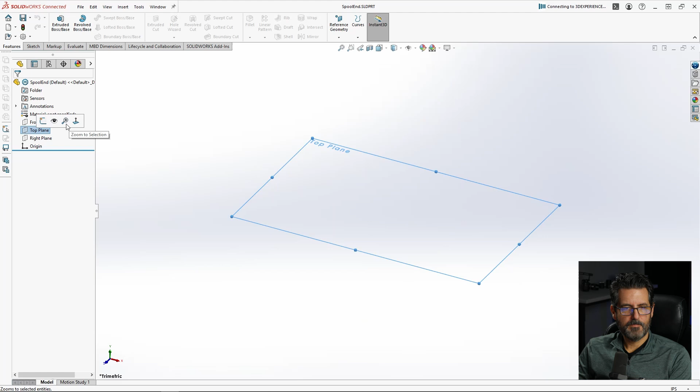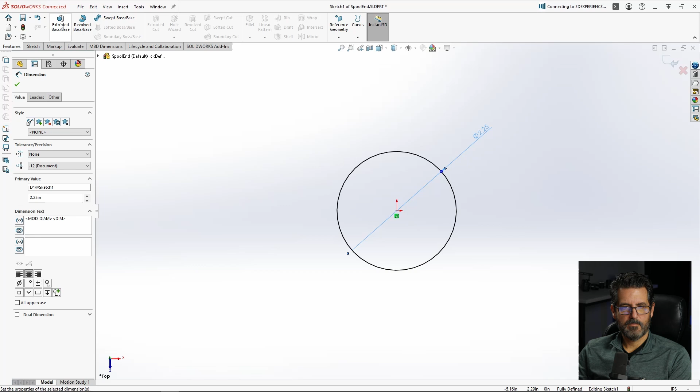Start on the top plane. Do a circle, so right click and drag to the right. Right click, drag upwards. And now we're going to make this 2.25. Going to extrude it. We're going to make this a 1/16 of an inch. And hit OK. Alright.

Let's make our little protrusion here. The inner diameter of the spool is 1 inch, so we're going to make this 0.96, give it a little bit of clearance. That way it'll slide in nicely. And then we'll put some fingers on it to hold tension. So let's go ahead and do that.

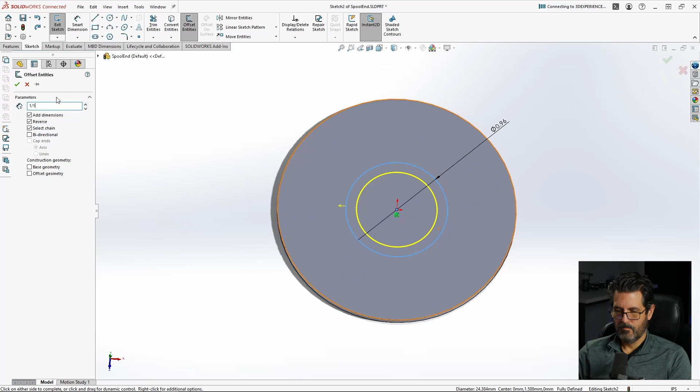And now let's offset that. I'm going to go inward. Let's make that a 1/16 of an inch also. All right, features, extrude. Let's make that 5/8 of an inch. There we go.

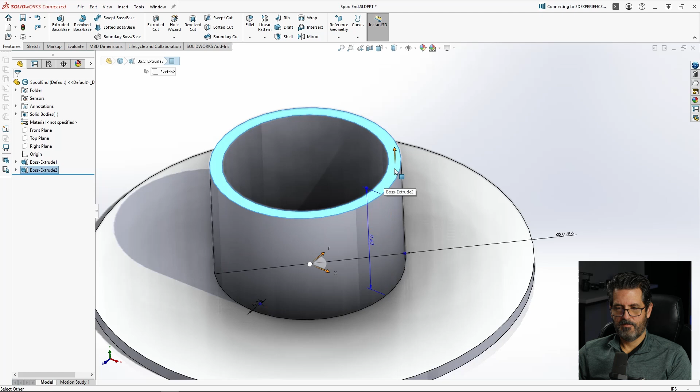Now I want to put a rim around here that will be the actual interference point to the inside of the tube. So I'm just going to do that by selecting the top face here, sketch. Then we're going to select this outside rim here, do a convert, outside rim again, and do an offset. Let's make that 1/32 -- no, I got 0.04, so 40 thousandths of an inch sticking out there.

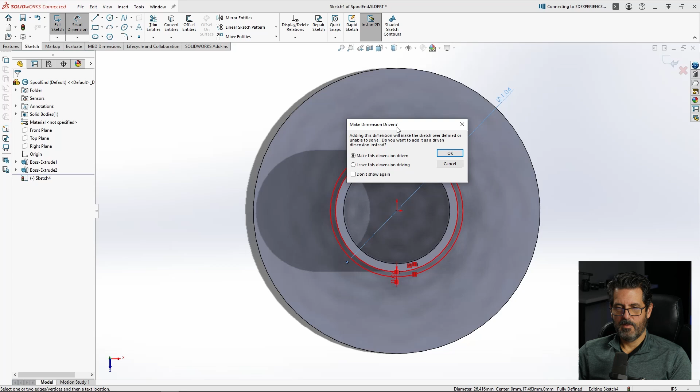And that actually makes the outside -- if you want to know dimensions of things, you can actually redimension them. Even though this is fully defined, it's black, I can put a dimension on this and it'll yell at me and say make this dimension driven, and we'll say yes because it's going to drive it. And now you can see we have 1.04, so it's just a little bit of interference there.

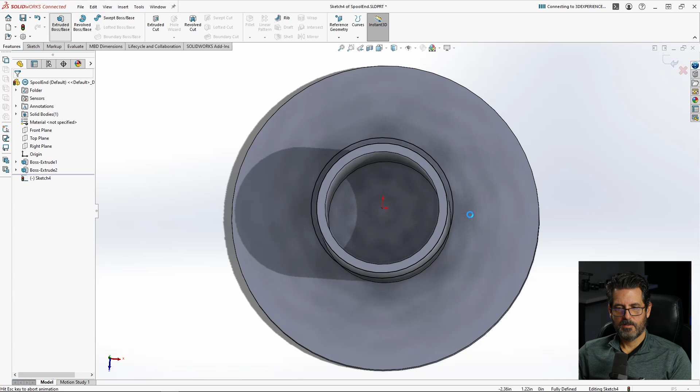So we're going to leave that like that. And now let's extrude it downward. So flip it over and we'll make it, let's go with an 1/8 inch, so 0.125. There we go.

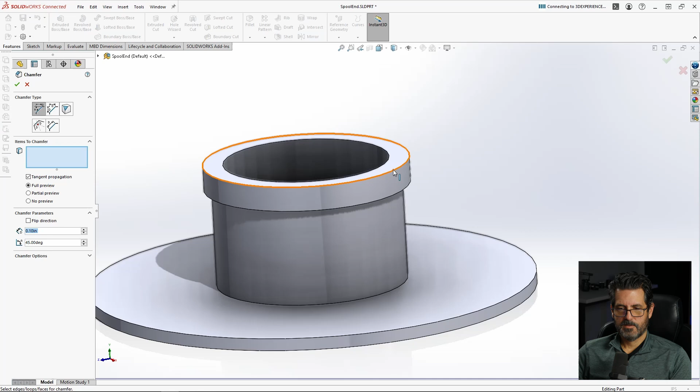And now we can put some chamfers on it just to make it lead in and lead out easy. And make that 0.04 also. There we go. That's good.

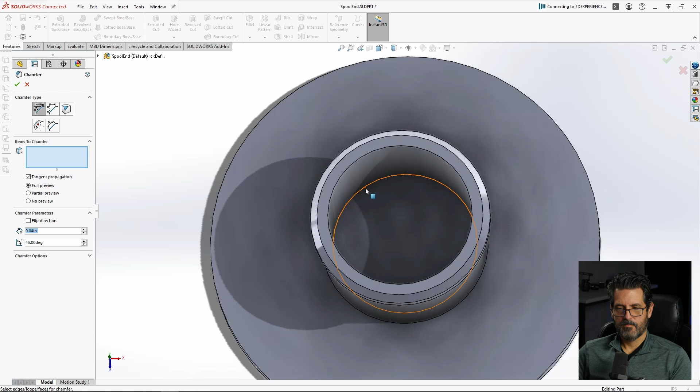Now we want to give it a chamfer down here to give it a little more rigidity, so this doesn't pop off here at the layer line. Give it more adhesion there when it prints. So let's go ahead and add another chamfer. There we go. Make it an 1/8 inch also, 0.125. That look pretty good? I think so. All right.

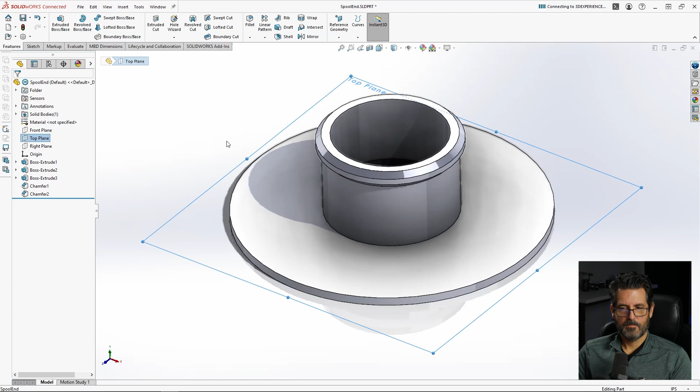And now we want to split this so it can actually be bent inward a little bit when it goes into the tube. That way it just creates a nice friction fit. So let's go to the top -- whoops, top of the part. Sketch. I'm just going to take that and...

convert them. Now we're going to draw some vertical lines here. Escape out of that. Right click, drag to the left, and you get a line. There we go. Now let's trim it up.

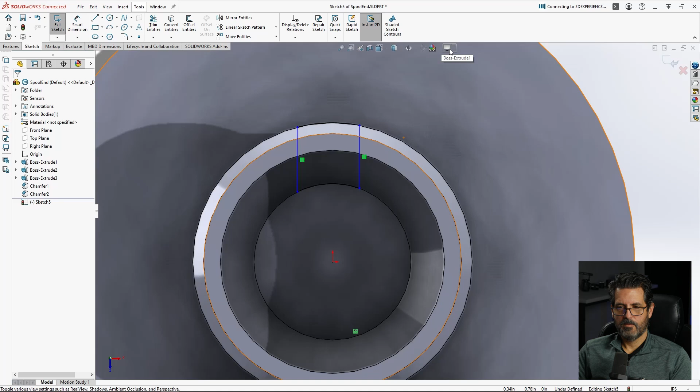Now we just have this little shape here. It's kind of hard to tell. I could probably turn shadows off. There we go. Now you can see it.

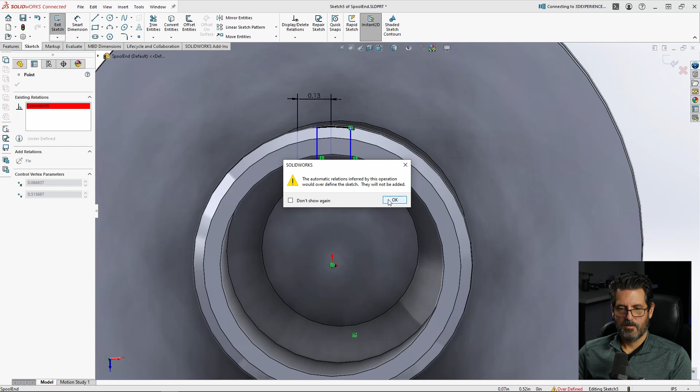We want to make this symmetrical, so let's go ahead and give it a width first. And we'll make this an 1/8 inch. And get it back over here toward the center. Okay, didn't like that. There we go. I dropped it on top of another line, that's why.

Now let's go ahead and give it a line to be symmetrical about. So we'll put a centerline in here, and we'll just select that, that, and there -- then there's a symmetric option. There we go, fully defined.

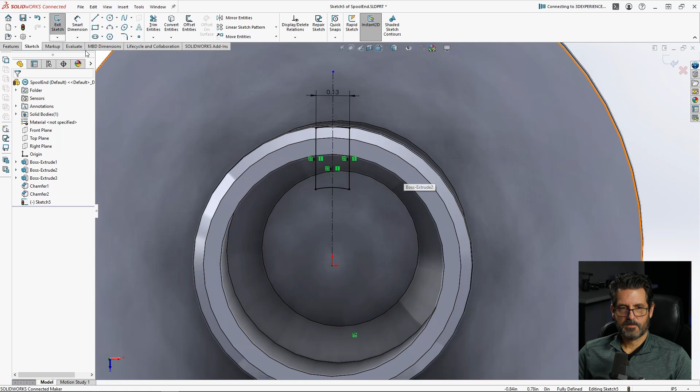So let's go ahead and go to Features, Extrude Cut, and we'll go all the way down, up to surface, hit Enter. There we go. Now we have a nice split in there. Now let's make a few more of them.

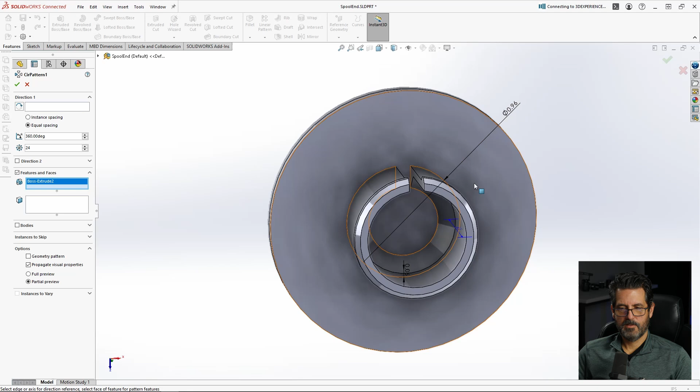So we will go circular pattern, select this for the rotation -- nope, it didn't like that. Let's delete that. Select that for the rotation, and then this for the feature. And I don't think we want 24 of them, I think we just want 4.

That looks good. Hit OK. There we go.

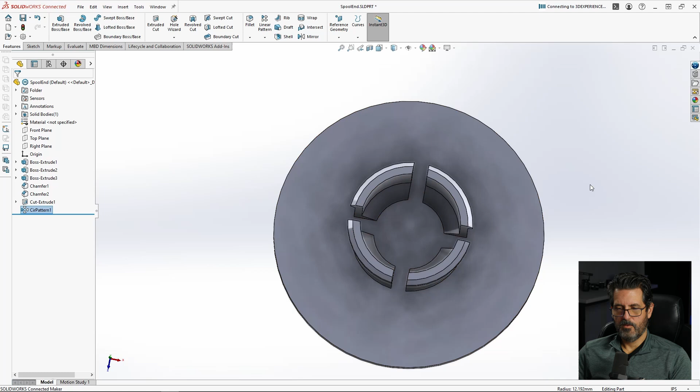One more thing I want to do. Probably should have done that before I put this cut in there. So we're going to go back in time. This is the time traveler here.

Take this rollback bar and we'll roll it back to the point where that hadn't happened yet. I'm going to select here and do a sketch right there. And while that surface is still selected, I'm just going to hit Convert. That gives me a circle there based on that edge.

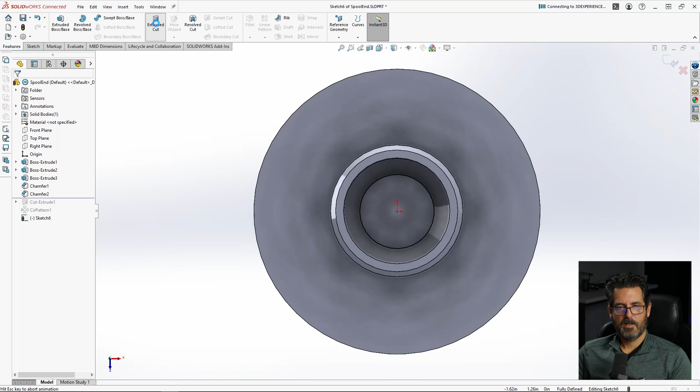And now I will Extrude Cut, and we will go through all. Make sure it's going the right direction. It is. And now we have a hole going through.

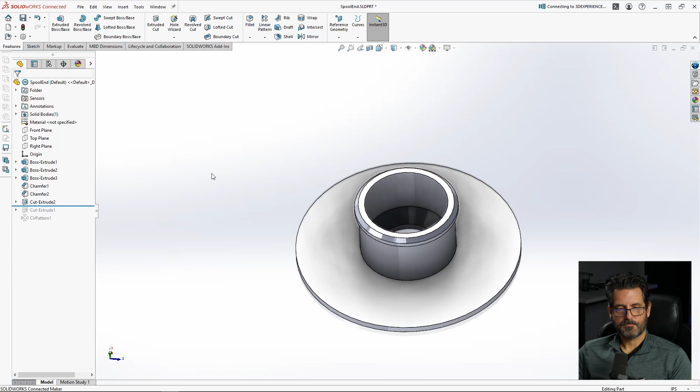So if we want to put a rod through there or a wire through there or something like that, we can. No real reason to have that closed up. All right, let's time travel again. And now we have a nice little part with some tensioners that should slide into the end of that tube really well.

All right, so now I want to put some little notches in here to hook the string into so it doesn't come unwound. Keep me from putting tape on it like I do now.

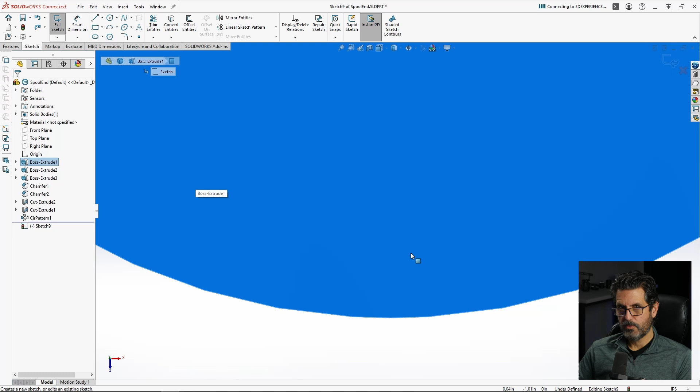So let's go ahead and select that surface, edit sketch, and I know the diameter of the string is 0.025, right around there. So I want to make it smaller than that. I'm going to make it bigger than that and then get smaller than that.

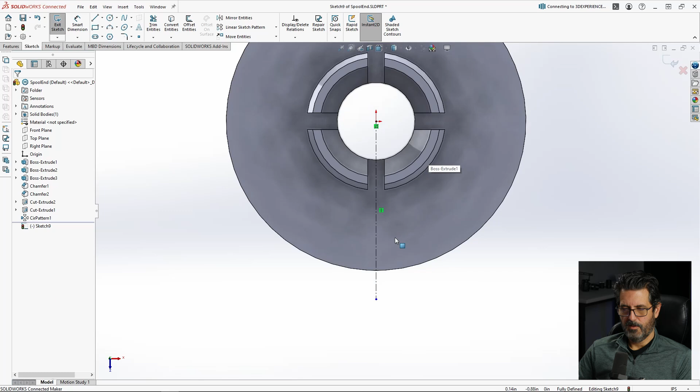So let's go ahead and I'm going to start with a center line. And all that is a line that's already selected for construction for you. So you can just put a line in and tick that box, be the same.

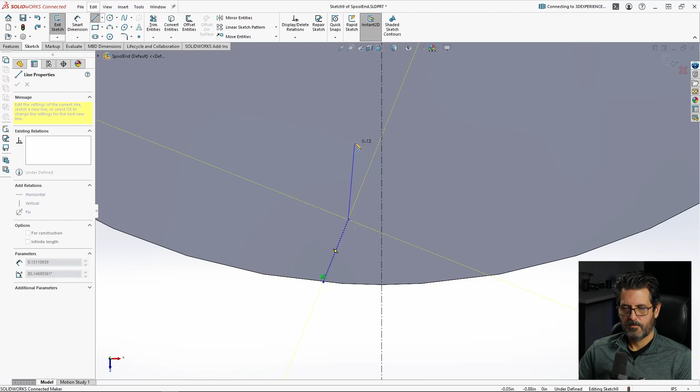All right, so I want to start with a line that comes off here at somewhat of an angle. I don't know why it did that. There we go. And then another line that goes at a little bit more of an angle. Yeah, actually I just want to make that straight.

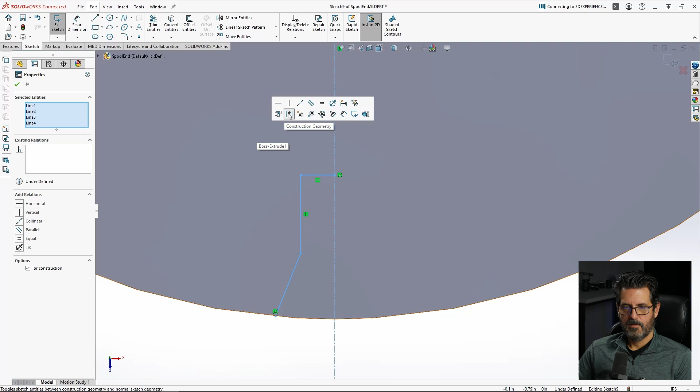Okay, so then we'll make the end of it straight for now, and we'll figure that out. Let's go ahead and select all that and go mirror entities. Now we have symmetrical.

We'll select that, convert, and then trim that up. Okay, so now we have just this little keyhole thing. It's way bigger than what I want.

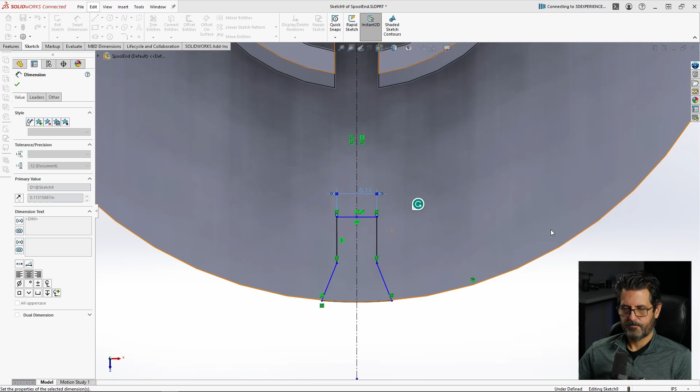So let's first start by defining this, because I know what that's going to be. See, it's 10 times the size almost. 0.0222. Whoa, see? Something like that.

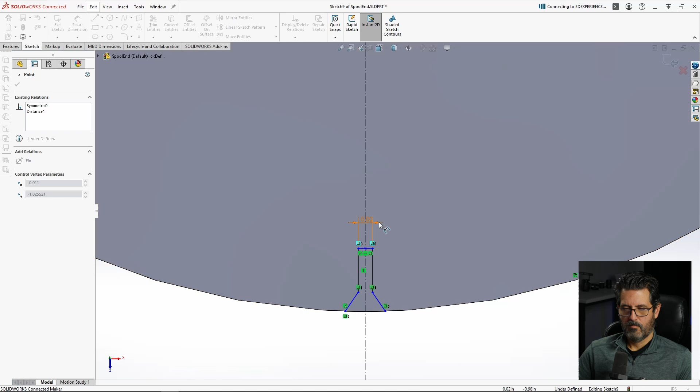0.03. Okay, and now let's dimension the height of that. 0.06 is fine. I'll make these a little bit of a lead-in here, so let's select the vertex and that leg, and we'll make this 45.

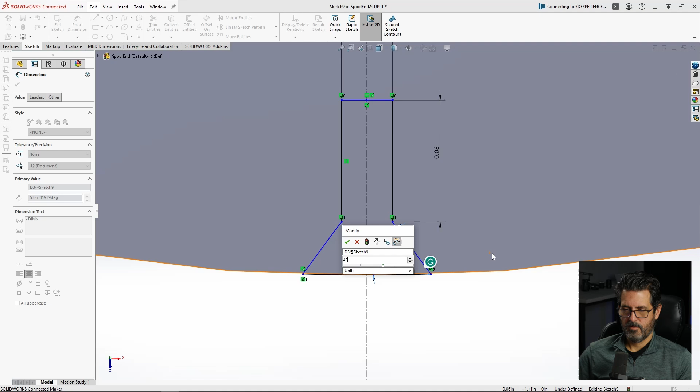60. Like that better. That's pretty good. I want to round this off though, so let's go ahead and do that.

And I will put a tangent arc in here, and automatically make it tangent to those two lines. And delete this. There we go.

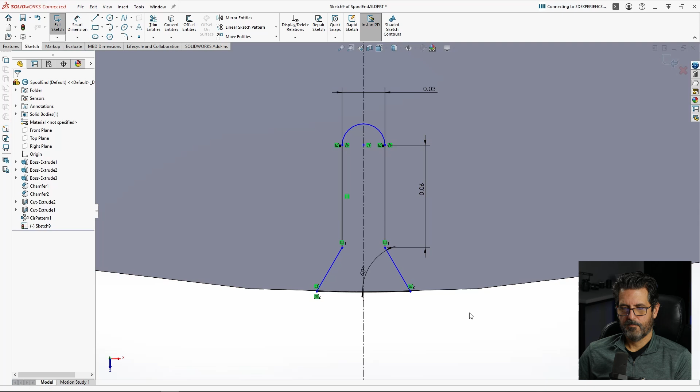And now I want to dimension from the center of this to the outside of this. And it can be hard because it wants to go to the center of that, you can see. So to get around that, you select that and then shift select this. Now you can dimension what I wanted to dimension.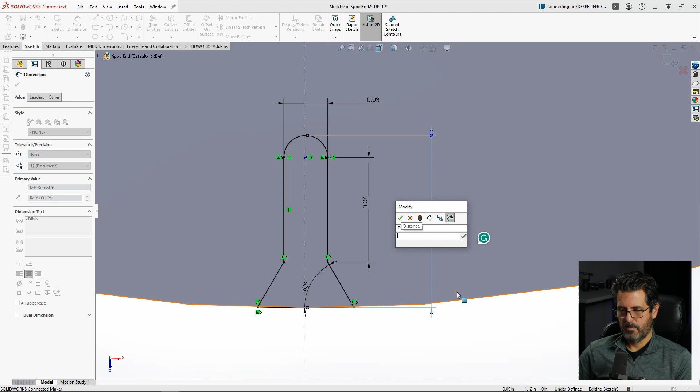And we're going to make that 0.1. And it's not much, is it? Let's go 0.125. There we go. Let's make this bigger.

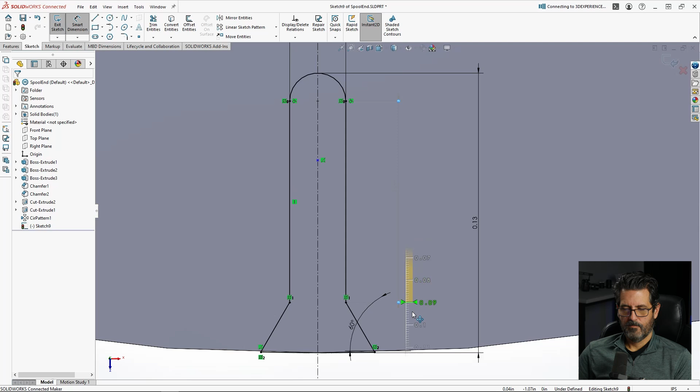That's more what I wanted. Okay, there we go. Now let's go ahead and do features, cut extrude, through all, okay. All right, there's our little tick mark.

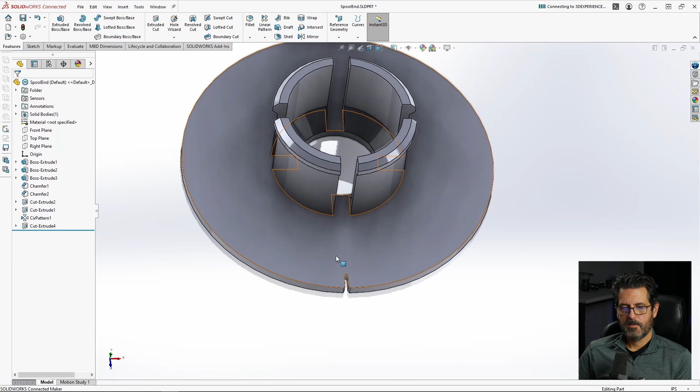Now let's put a bunch of these around there so we always have a place to store the end of our line. So we will go circular pattern. For the rotation point, we'll select that cylinder, and now we'll select this as our item. It's putting 4 in there. Let's just equally space these. I think 8 looks good.

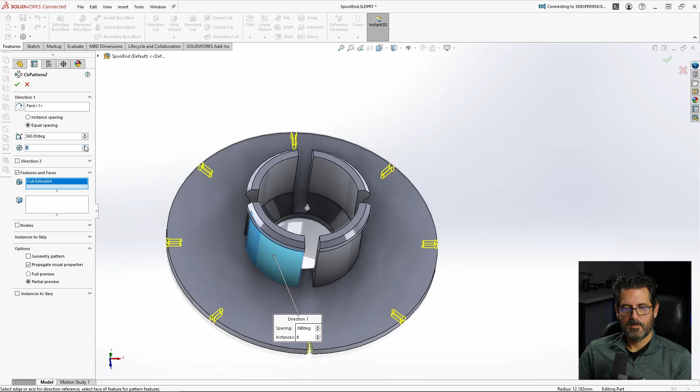Okay, I think we have a finished part here. So let's print it and see how it comes out.

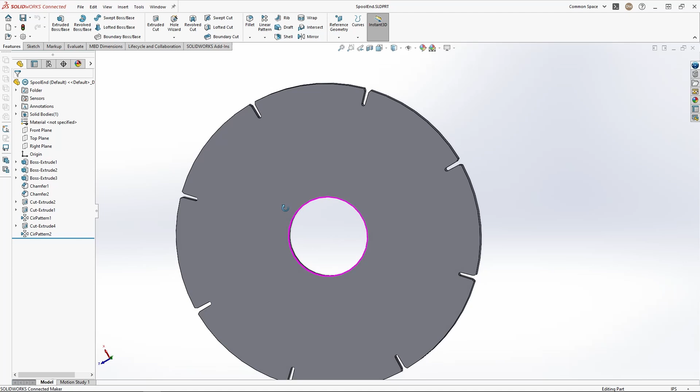One idea I had when I was uncoiling my string and realizing I had to wind it back up is to put a little hex in here so I can put it on my drill and just wind it back up. So we're going to do that. We're going to go back in time here to that and undo that.

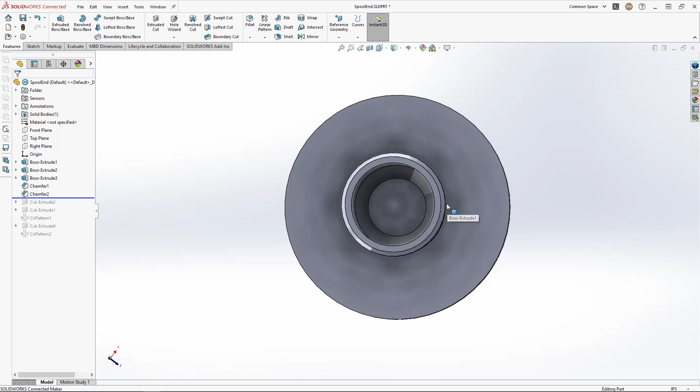Now I want to put an actual sketch there. We're going to put some meat in here, and we're going to have a hex that is a quarter. So let's go ahead and put that in here as construction geometry.

And we will make that 0.25. There we go, so that's going to be the size of our hole. We're going to make sure it will house that just fine. Let's go ahead and Control A to select all, Control select that, and then hit for construction on all that. Okay, now that's all construction geometry.

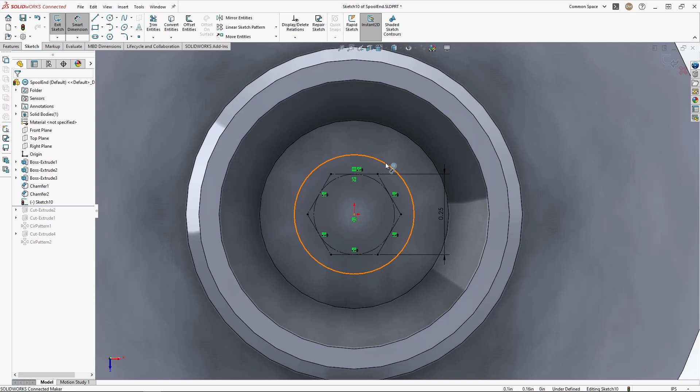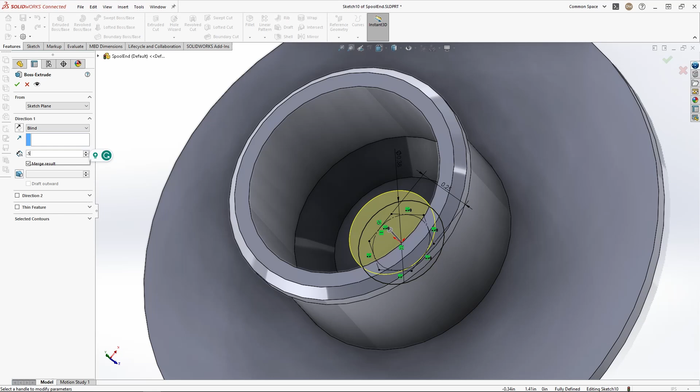And we'll make this 0.375. I think that looks pretty good. Extrude boss, and we'll extrude this in, so let's go 0.5 here. There we go, and that's just gonna show up like that.

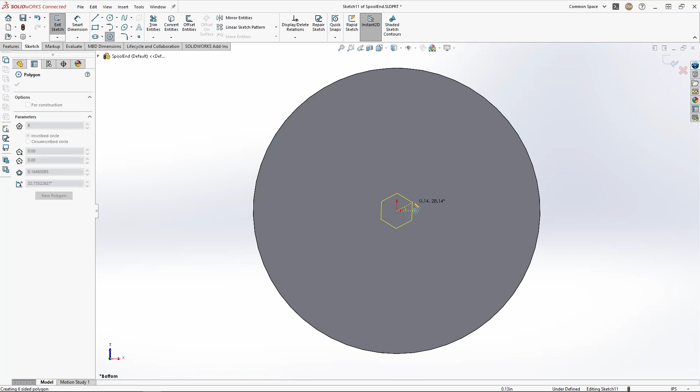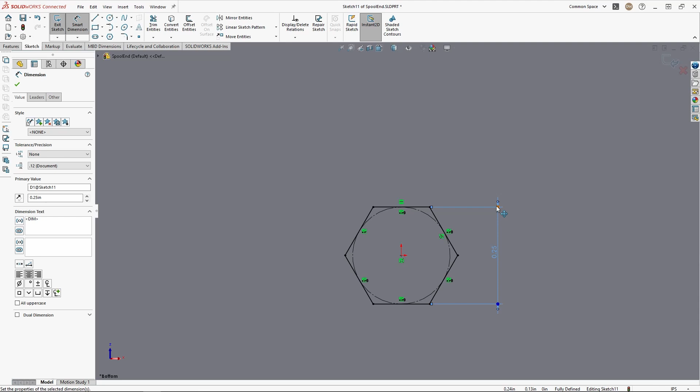Now we will take this hex and put it on this surface. I'm gonna go ahead and do that over like so. Make that horizontal, go from here to here, 0.25. The hex I'm using is a hair under 0.25, like 15/64 or something like that, just one I had in my socket set, so 0.25 will work really well.

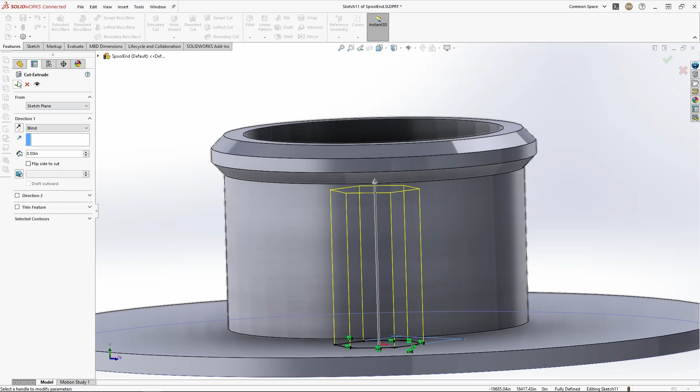So I'm going to now extrude cut that, extrude that up in there. It's 0.5, that looks pretty good right there. I'm going to make this a little bit more than 0.5. Let's see if we can just drag this here. Maybe 0.6.

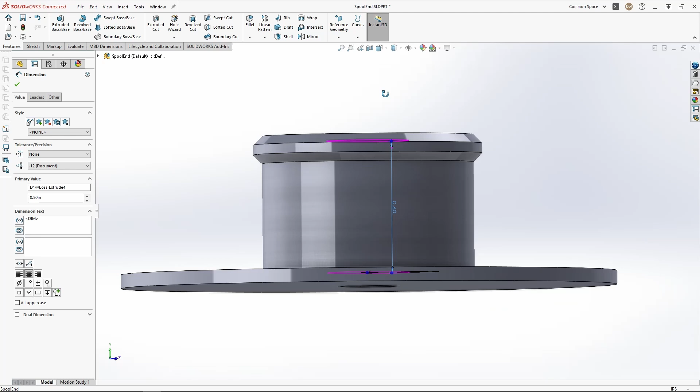Now I want to give this an angled top up here, which you can't see, but that way it will print well. So let's go up in here. I'm going to turn off all this fancy stuff, and that way I can see up in there really well.

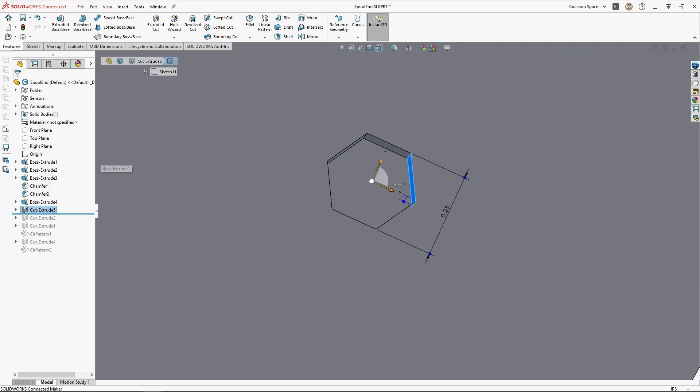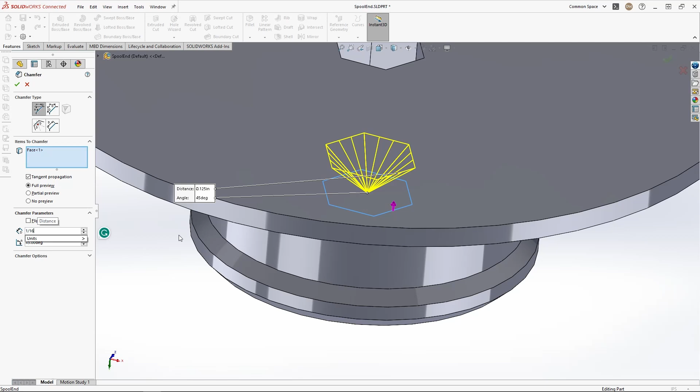Okay, just chamfer all that right there. There we go, chamfer, and we'll make it 0.125. That's way too much, let's make it 1/16. That's pretty good.

Let's go add a 32nd. There we go, almost comes to a point up there. It can handle that much overhang.

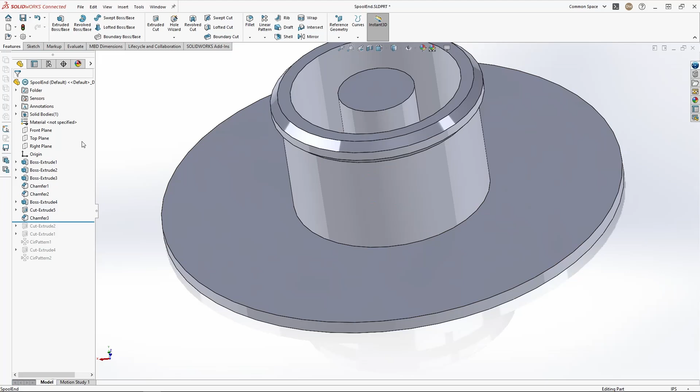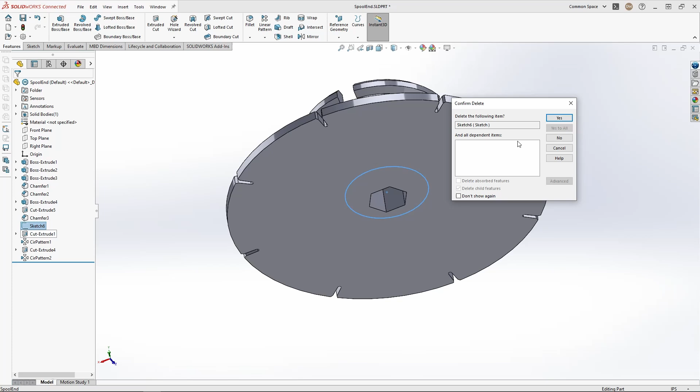Now let's go ahead and turn back time again, and that's going to blow up this, so we want to get rid of that cut through. There we go, get rid of the sketch too. Okay, so now that's how I want to print this.

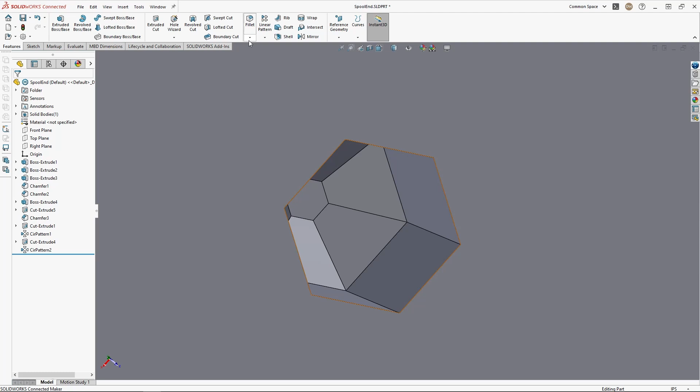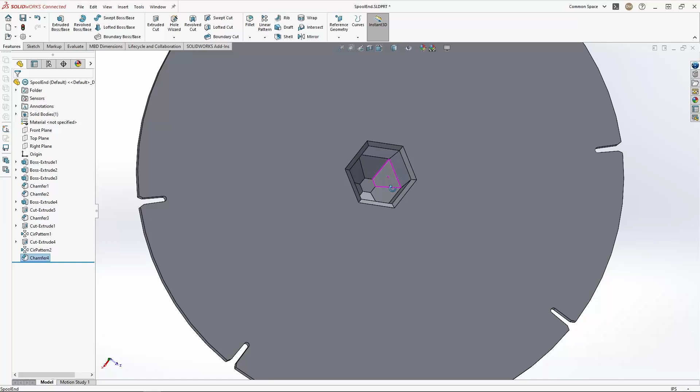I also want to give it a little bit of a lead-in chamfer too. I'll do two things that will keep it from bulging out on the build plate and also give you a little bit of a lead-in. So we'll chamfer, select loop, we want to select that loop, and now we'll make it pretty small, 0.02. All right, looks good. Let's look inside of it, see what we got there.

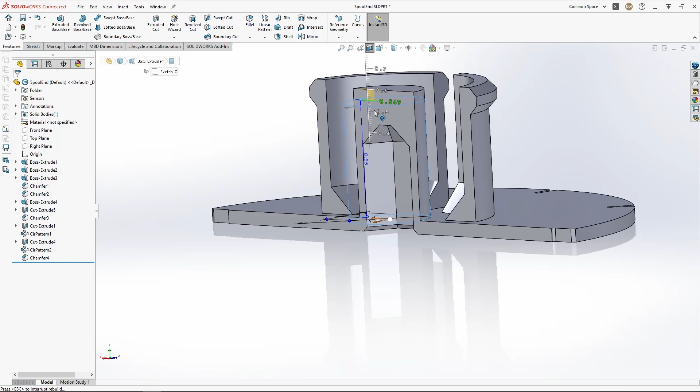Got more meat than we need up here, so let's go ahead and fix that. Go ahead and drag this back down, like 0.375 is there. I'm actually going to go 0.55 right there, and we're going to change the depth of this and make it a little deeper. There we go, I like that.